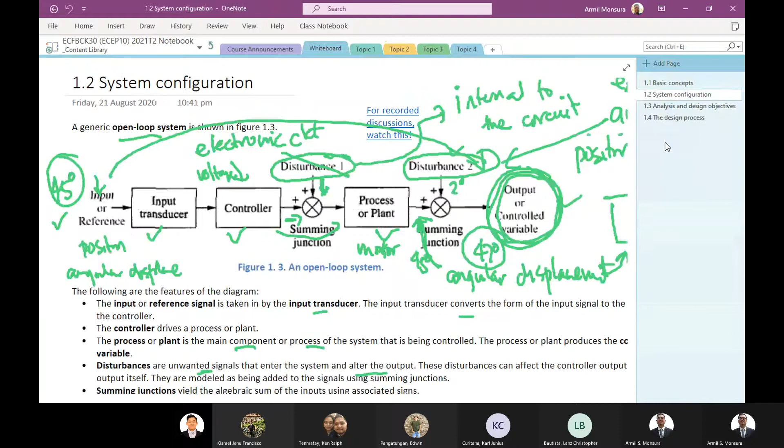Okay, so let us proceed with our next topics. This time we'll discuss yung system modeling na tinatawag natin.

We could have discussed before under this analysis and design objective. Some of the things that we need to know, especially when we want to talk about what are the major objectives of our system analysis and design. Okay, so when you say system analysis, pag-usapan natin ito.

When we say system analysis, this pertains to determining or characterization, bale, characterizing para din siya.

When you say determining or characterizing, it simply means we want to know something about the system. So ano ba i-characterize natin? Basically, we want to determine or characterize system performance. We want to know how our system is performing.

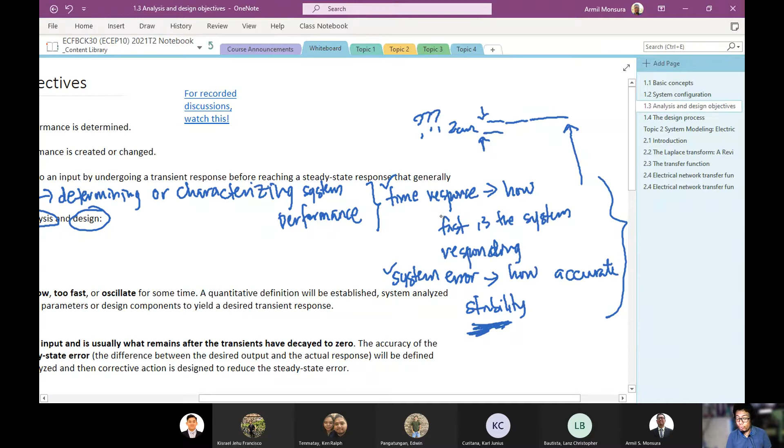So, if that is the case, then we will need to design your system in such a way that we will be producing the desired transient response and or reduce the steady state error. And we want to achieve all of this while ensuring that your system is stable still. Kasi maaaring sa una, meron kayong system, stable na siya. But you don't want its transient response or you don't want its steady state error or both. But your problem is, when you redesign your system, your system tends to be unstable kapag pinalitan mo na yung ibang parameters mo. Or pinalitan mo na yung ibang parte ng system mo, in trying to achieve the transient response or the steady state error.

So, in the system design, we would like to achieve these three simultaneously. But still, this is the most important part. This would be the most important part of your objectives. That is, while you are trying to produce the desired transient response or trying to reduce the steady state error, dapat yung system mo would be within the limits for which it would be kept stable. Is that clear?

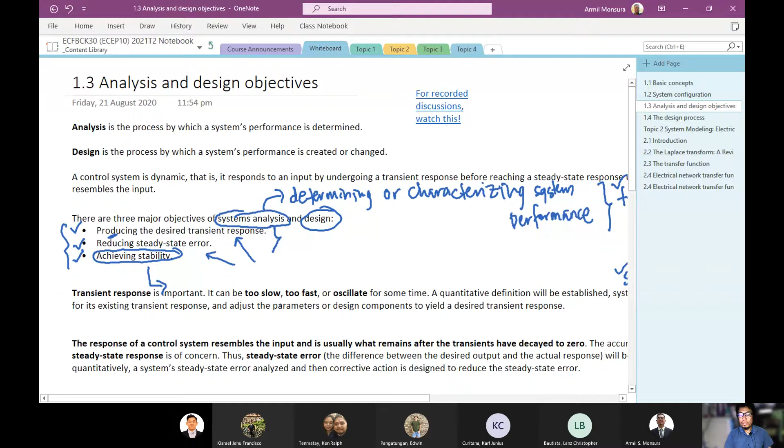Okay, so ayun. Now, in that process, we would be following this design process steps, the process by which we design your system. So, there are 6 steps here na enumerate. But I would like you to read them. And later on siguro bigyan ko kayo ng discussion video regarding dito.

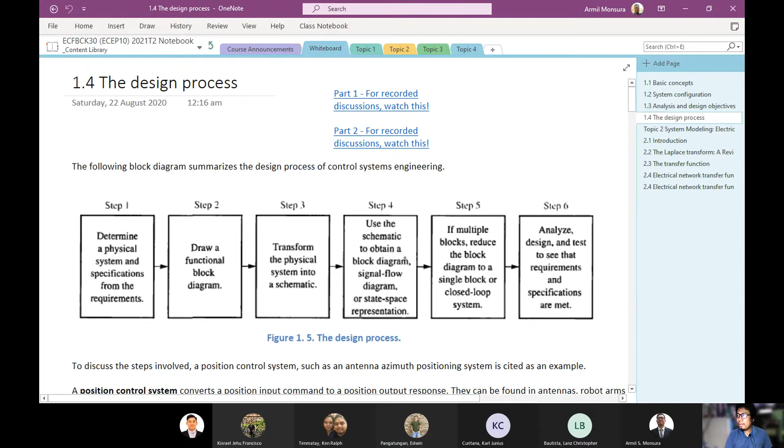Pero ayan, may mga link naman na nandito which you can actually follow. But the thing is, if you want to discuss these 6, we would be first determining the physical system and specification from the requirements. So when you say the physical system, it means the system that you would like to design. And specification, meaning what are the requirements or what would be kumbaga, ano yung mga indicator natin that we are meeting the requirements. Because there are requirements.

There are requirements for your system. Pero dapat meron kang indicator, or performance indicators. We call it performance indicators. We have performance indicators which tells you whether or not you are meeting the requirements. And these performance indicators come in the form of specifications.

For example, dapat ang rise time niyan is 5 seconds, less than 5 seconds, mga ganun. It means that you know that you are getting dun sa requirements mo. If you are able to measure your rise time to be 5 seconds or less than 5 seconds. O dapat yung peak time - these are just examples, and then later on we will be discussing these things. Your peak time should be less than, say for example, 7 seconds, so dapat it means that your system should be able to reach its peak in less than 7 seconds.

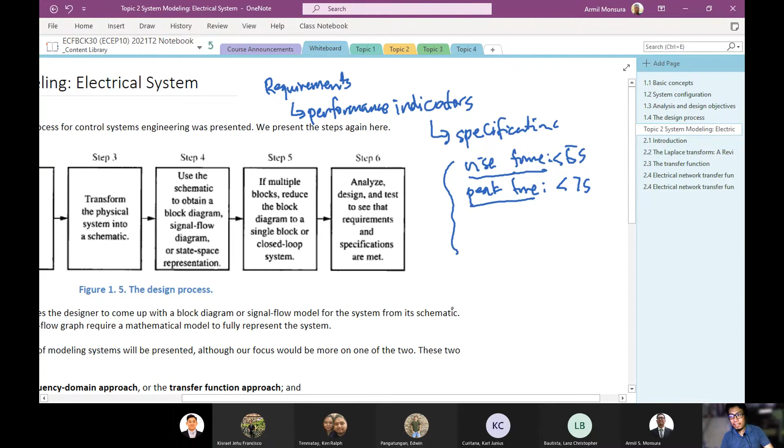So these are your specifications din tawag. And the performance indicators are this. So you specify your requirements in terms of these things. So from there, at the start, dapat alam natin yun - what would be your physical system and what would be your specifications, or what are the specifications of your system from your requirements.

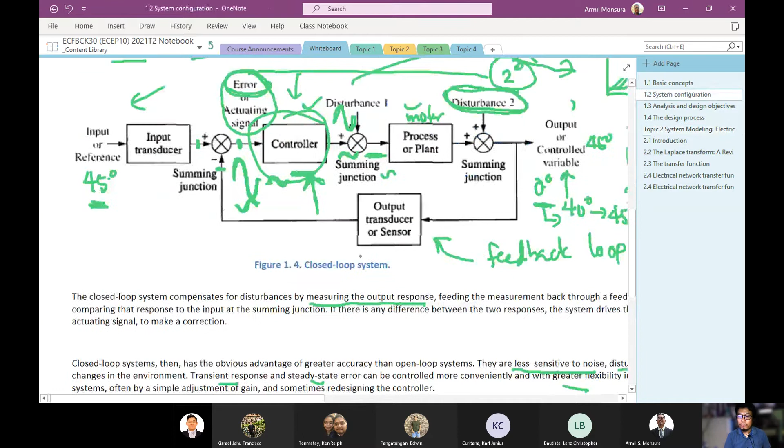Okay, the next step of which is you draw a functional block diagram. When you draw a functional block diagram, it comes in the form of this. Kung maalala nyo yung pinag-usapan natin ito last time, it should come in the form of this one. So which means that you have to determine what should be its input transducer, what should be its controller, what should be its plant or process, and what should be the output transducer. And some other things that are required for the system. So that would be the functional block diagram. Is that clear?

Yes, sir. Okay, now,

So that's your functional block diagram. We will have to pattern your block diagram in terms of that closed loop configuration. Now, the next thing is to transform this physical system into a schematic.

After you determine the relationships between those components, you will be able to determine what components you have. What kind of input transducer do you have? What kind of controller do you have? What kind of plant do you have? What are the components here? You will be able to determine all of those, and then determine their relationship in terms of this functional block diagram.

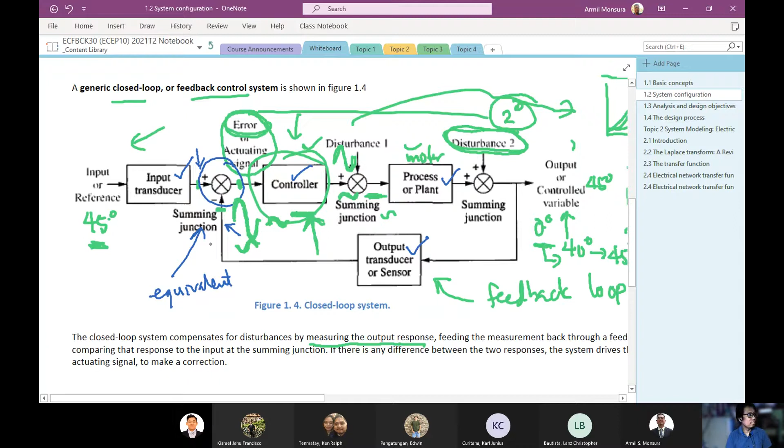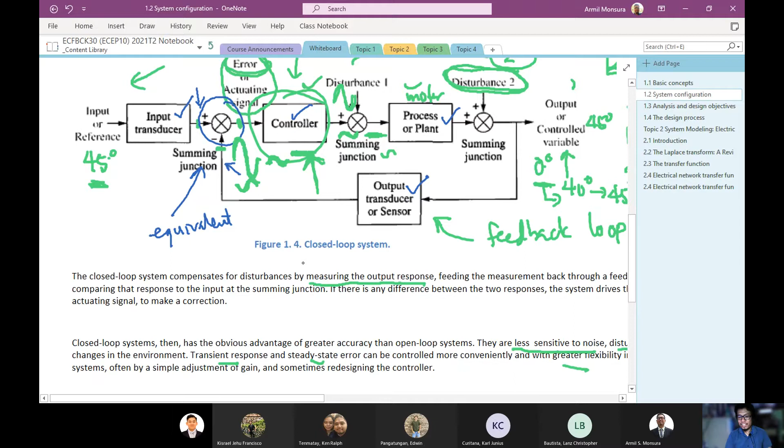May iniisip ba tayo? This should be pretty basic for us since we've covered a lot of electronics by this point, so we should already know this. Wala tayong naiisip na circuit na pwede mag-subtract ng dalawang signal?

Naalala niyo yung... Wait, sir, sa op-amp yun, sir. Ha? Yung alin? Sa op-amp yun, di ba, sir? Anong op-amp? Anong configuration ng op-amp?

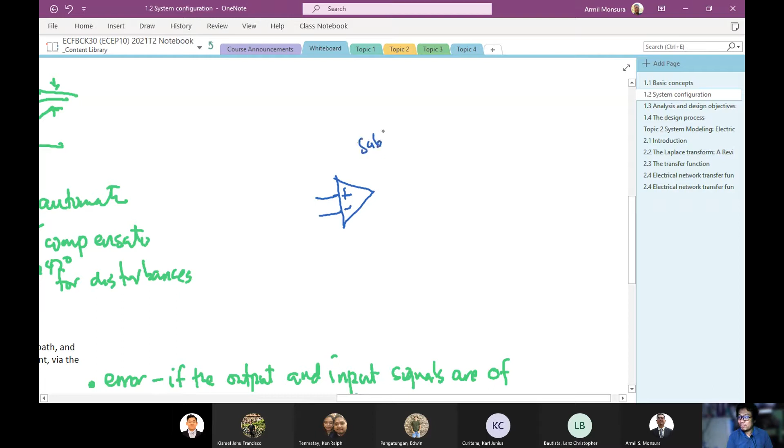Actually, tama yan. Wait, sir, naalala ko. Meron tayong tinatawag na yun, na subtracting, or ano ba tawag dito? Meron tayong configuration ng op-amp that can actually subtract, your circuit. Meron tayong tinatawag na subtracting amplifier or adding amplifier.

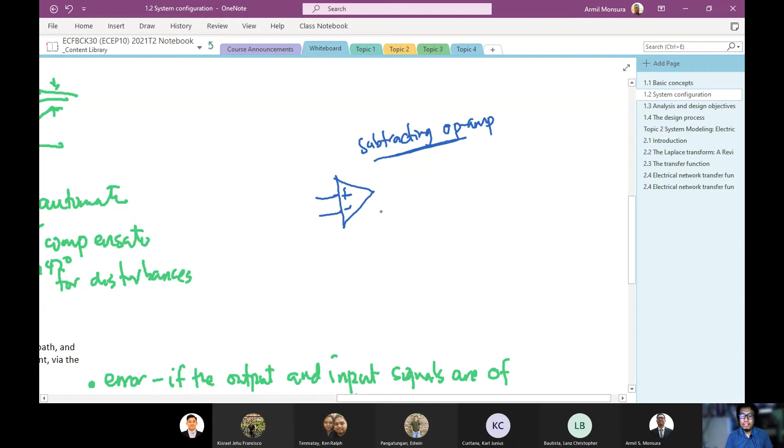Okay, so we can actually use that. We have a configuration of op-amp that can actually perform subtraction. We call that a subtracting amplifier. So we can use this as a circuit that can actually perform subtraction.

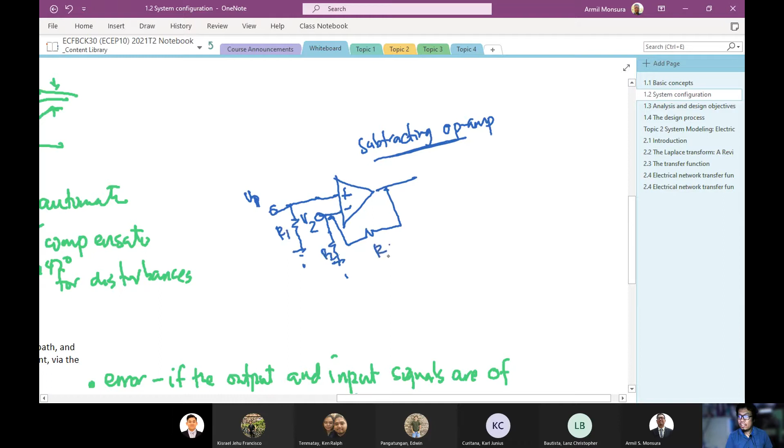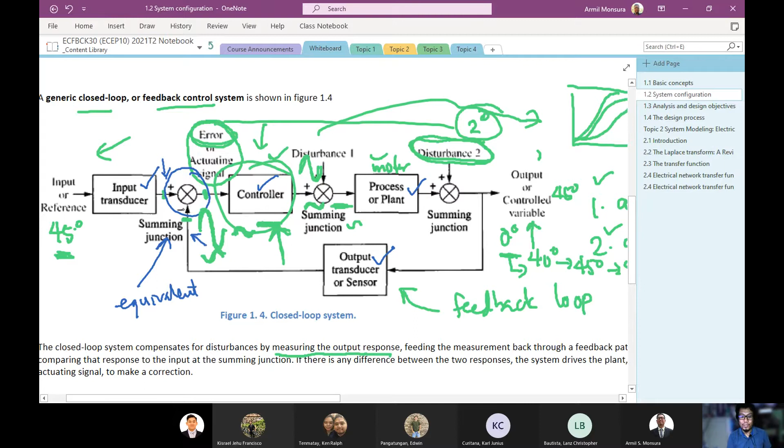So these things are not really, for example, this summing junction can be represented by a subtracting operational amplifier. But it doesn't mean that this controller is actually a separate entity from this summing junction or from your subtracting op-amp, kasi you can actually have this same thing — this may be your subtracting op-amp plus your controller.

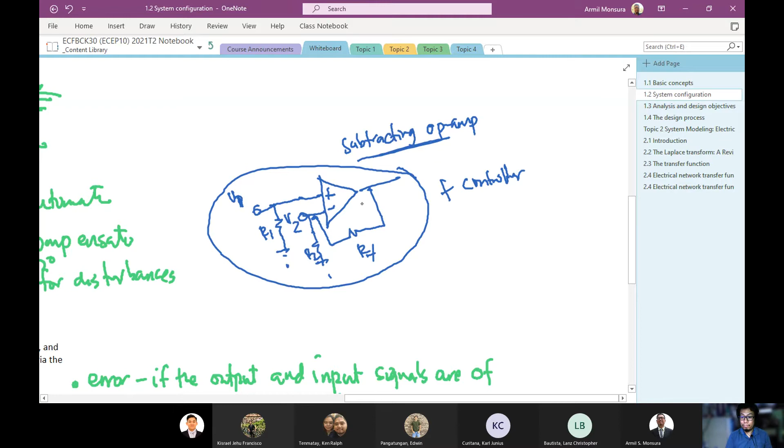You can actually put in some additional components here that can transform that circuit into this part of your functional block diagram — it can actually be represented by a certain circuit. So maybe you use just one op-amp for that too, but they can also be separate.

It doesn't mean that if you see a summing junction here, this can also be represented by an op-amp. For one thing, this disturbance here is simply basically a concept — konsepto lang siya. In this case, for example, this represents an internal disturbance or internal noise that is exhibited in your controller circuit.

So this summing junction is in no case a physical entity or a physical circuit itself, kasi ito is simply just a concept that you integrate your internal noise into in your analysis. So what I'm trying to point out here is that your configuration may or may not be physically represented in your circuit.

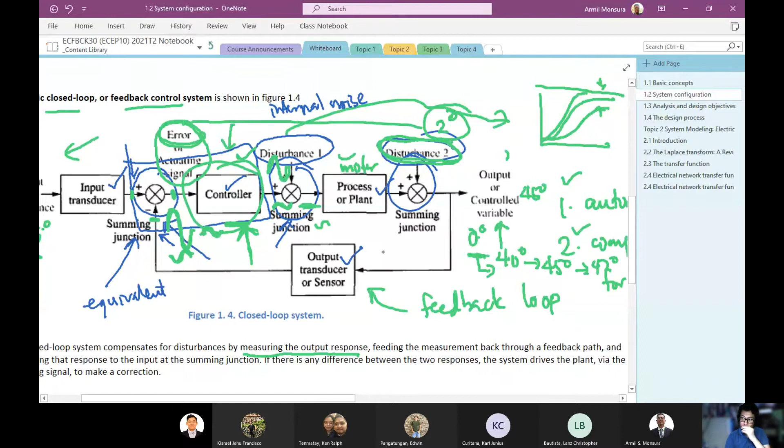Disturbance 2 is another concept - that of the external disturbance that affects your process or your plant. And it's actually affecting the output.

So when you put this functional block diagram into a schematic, what is required of you is to actually know the system in its full operation, so we know which component we will really see inside the schematic, and which ones are just concepts that will not really appear on your schematic.

That is why, when you transform this functional block diagram into a schematic, you should be really careful. One thing you have to master, one thing you have to be mindful of when doing step 2 and step 3, is that you really have this mastery of what we call modeling. You may know the functional block diagram but not really know how to transform it into a schematic.

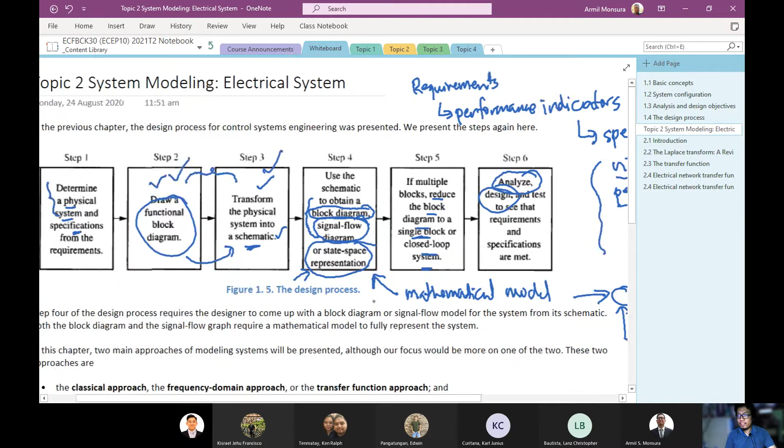But then again, what you need to think of is that these steps are not actually linear. Sometimes, for example, in our approach, we will try to skip step 5 first. If we're good at step 4, we skip step 6, then we go back to step 5 in a linear fashion, then back to step 4, then step 6, then step 5, then step 6 again, something like that. So in our lesson, this is not really linear, and in actual practice, this is not actually a linear process. When you say linear process, it means straightforward, this is how you do it. You would not be doing that in that manner.

And especially, there are times that you would not be performing these steps in this exact process. For example, from here, after obtaining a functional block diagram, you would be able to skip this part, and instead of doing all of this, you would try to come up with a computer model. That means the computer generates the model for you - the computer itself or the software itself would actually obtain the model for you.

But there's something you need to input into the system. Like, for example, you need a set of input and output signals for your computer, for your software, to come up with a model by itself. That means you need to already have the system built. You have a test input signal, you take its output - the input-output pair of your signal from your system - and you put that into your computer. Then the computer, using that set of signals, generates the model for your system.

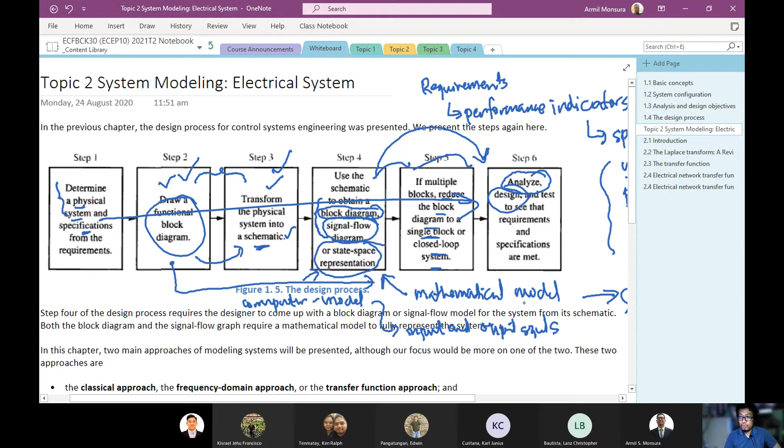So in this case, we're saying that one thing you have to perform after completing step 1, step 2, and step 3 is this: you obtain a block diagram, a signal flow, or a state space representation, in which we would like to get a mathematical model for your system. This particular part of our lesson would actually deal with system modeling.

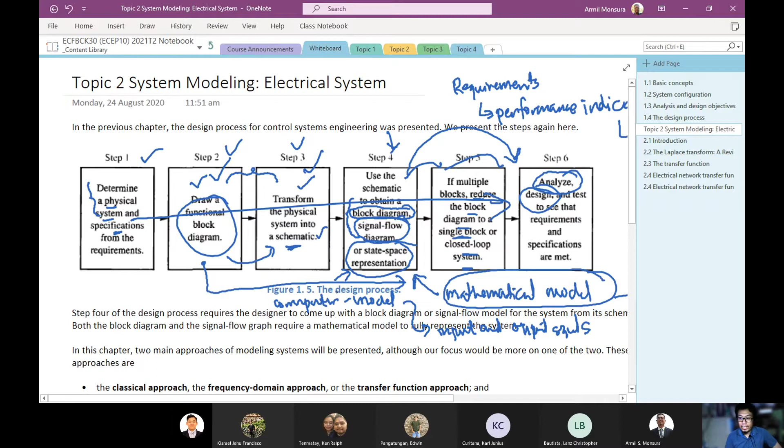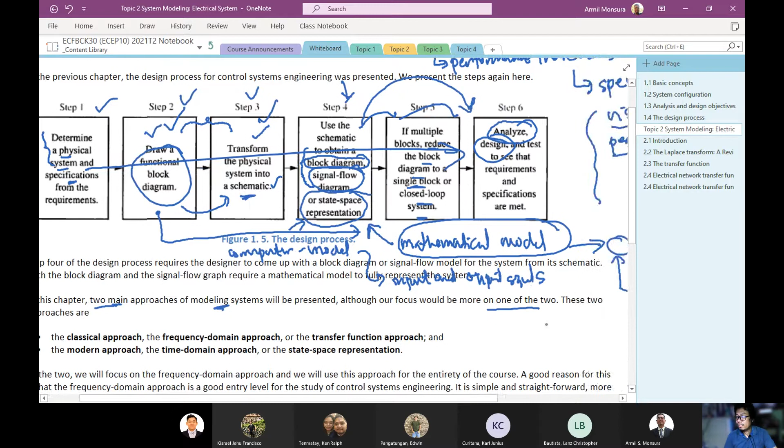I will introduce you to two main approaches in modeling systems, but we will focus on one of those two. The two approaches are the classical approach, or the frequency domain approach, also called the transfer function approach, and the next approach which is the modern, time domain approach, or the state space approach.

The classical approach basically deals with the Laplace transform model. Now, I'm pretty sure all of you have already finished advanced engineering mathematics, so you were able to study what the Laplace transform is. Am I right? Yes sir. Okay, so since you already know the Laplace transform, we'll actually study Laplace transform in the next topic. We'll discuss it, but it's expected that we already know this Laplace transform.

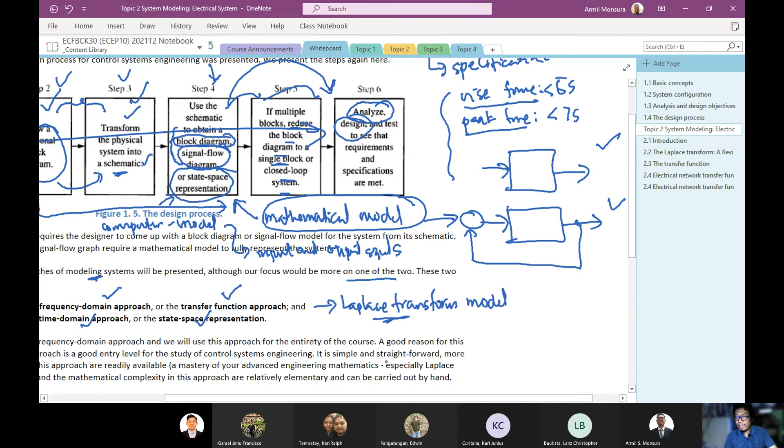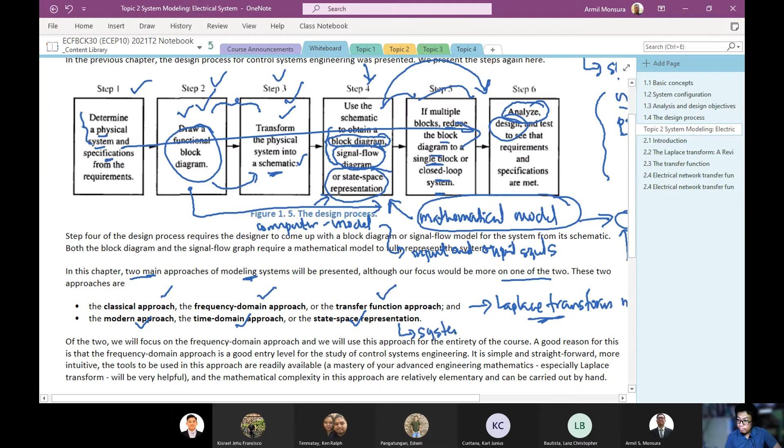Now, the next approach I would introduce you to is the time domain approach. We have a modeling approach called the state space representation. Now, the state space representation consists of a system of first order differential equations.

So, for example, if you have a second order system, you have to break down that second order system into two first order systems or first order differential equations. When you say a system is second order, it means your system is represented by a second order differential equation - its input-output relationship is represented by a second order differential equation. That's what we mean by a second order system.

In state space modeling or state space representation, you would have this second order differential equation broken down. We need to break it down into two first order differential equations.

That is why it's called a system, because it means that you have multiple differential equations. You don't just have one, but multiple differential equations, and all of those differential equations are of first order.

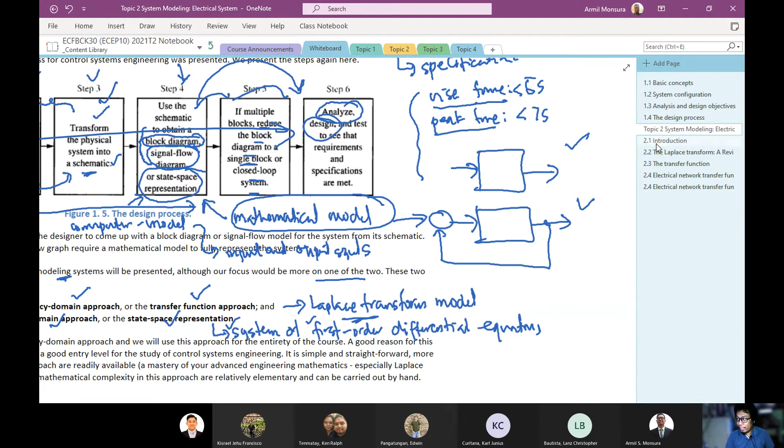So now, I'm discussing Article 2.1. Let me shift the discussion here.

As I have said in the previous discussion, there are two approaches. One of them would use frequency domain.

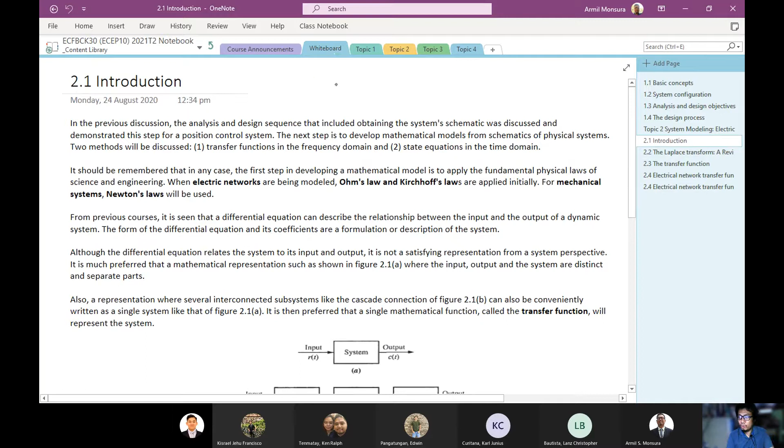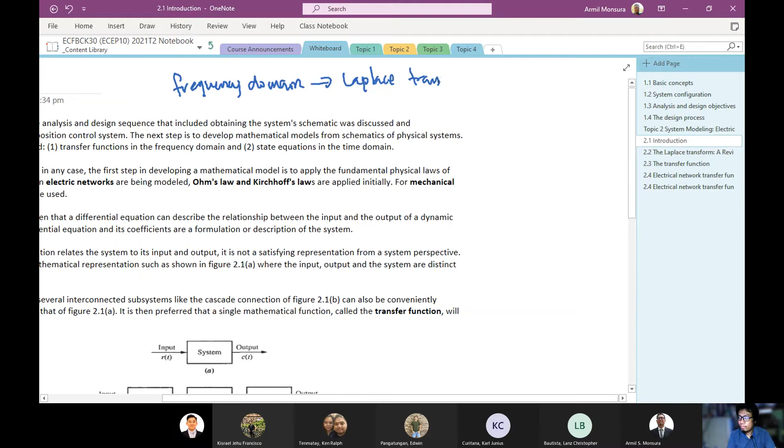And the other one would use, or it would use, Laplace transform. The other one is the time domain, which would use differential equations.

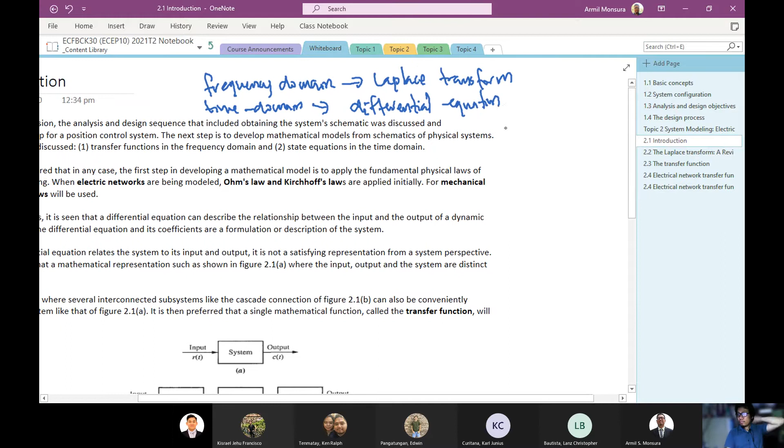So, in terms of the Laplace transform.

In the previous discussion, the analysis and design sequence that included obtaining the system schematic was discussed and demonstrated in this step for a position control system. The step is to develop mathematical models from schematics of physical systems.

So we have discussed two methods. I am discussing two methods now. Number one is the transfer function, and the other one is state equations.

It should be remembered that in any approach that you would use, the first step is to apply the fundamental physical laws of science and engineering.

So if you would be starting the modeling in its very basic and fundamental sense, you would start with the basic laws of science and engineering.

For example, if you are talking about electrical networks, you would be using Ohm's law and Kirchhoff's law in order to come up with models. For mechanical systems, you would be using Newton's law or Newton's laws of motion.

But again, this applies if you are to come up with a model that comes from a schematic.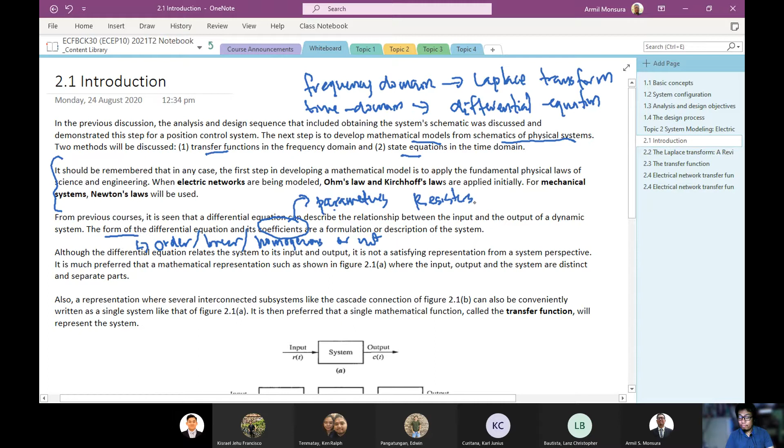For example, if your system is electrical, it has a resistor, it has resistors, it has capacitors, and in some cases, it has inductors. Their values are actually called parameters.

For example, if your resistor is 10 ohms, your capacitor is 1 farad, and your inductor is 0.1 Henry, these are what you call parameters.

Those are what you call parameters. And depending on the system, there are many other things you could put in as a parameter in the system.

So basically, in its basic sense, a parameter can be described as something that is constant to the system. But not really constant, because if that part, that system or component, is replaced, its value is no longer the same.

So basically, it is constant for a particular situation.

That is how we define a parameter. For example, sa motor mo, meron itong mga certain set of parameters. May mga values yan that is put into your equation as a parameter or as parameters. Ngayon, pag nagpalit ka ng motor, yung lumang motor ay pinalitan mo ng bagong motor, itong mga parameters na to would actually be changing. Maaaring hindi magbago yung forma ng equation mo, pero ang magbabago yung mga coefficients niya. Is that understood kung ano yung role ng parameters sa model mo?

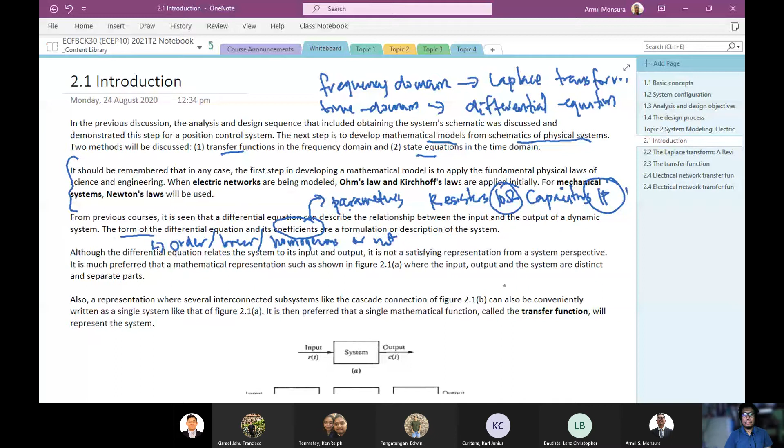Okay, mukhang dalawa lang nag-reply. So, kumbaga, pag nakakita kayo ng mga coefficients sa model natin, whether it's in the form of the differential equation or of the transfer function, yung mga coefficients na makikita nyo doon are actually coming from the parameters. They would actually originate from the parameter, from the components. Those coefficients are called parameters, and these parameters or coefficients would actually originate from the components of your system. So later on, mapapansin nyo naman yan.

Now here's the thing. Pag meron tayong system, the input to the system or the signal that is an input to the system is designated as R of t. R is for R of t, it means R as a function of t. And that R stands for reference input. Kaya yung signal na yun, we refer to that as the reference signal. We use the notation R of t to represent the input signal to your system.

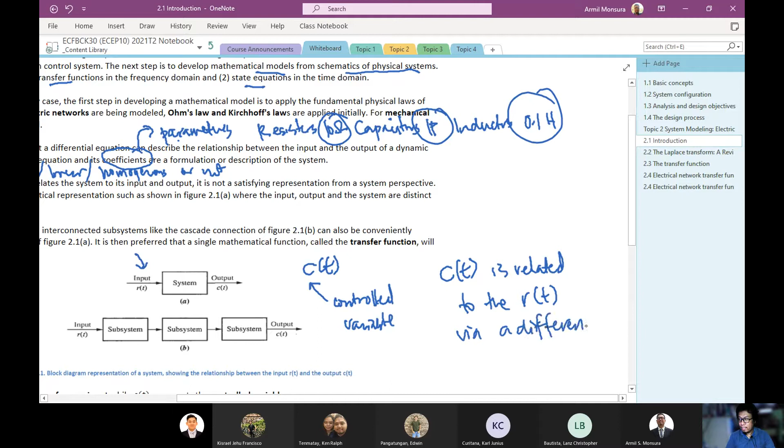Now, when we describe your system in this manner, your C of t is related to the input signal or the reference input via a differential equation. Yung relationship ng C of t at saka ng R of t is basically controlled or described using a differential equation such as this one. Ganyan yung itsura ng relationship between C of t at saka ng R of t, if we describe your system in this manner.

So as you can see, medyo may pagka-komplikado siya, di ba? It actually is very complicated with that one. What we like to do with this one, ang gusto sana natin is there is a simple way to actually relate these two. And that simplest way is actually done using Laplace transform.

So the easiest way to actually relate the two is by actually obtaining the Laplace transforms of R of t and C of t. And in that case, we would be able to describe, makikita nyo ito in a later topic, that equivalent system in terms of the Laplace transform R of S and C of S, as your input, or the transformed input and the transformed output itself. And using this, we would be able to characterize this system using the notation G of S, and that we will find that C of S equals R of S times G of S.

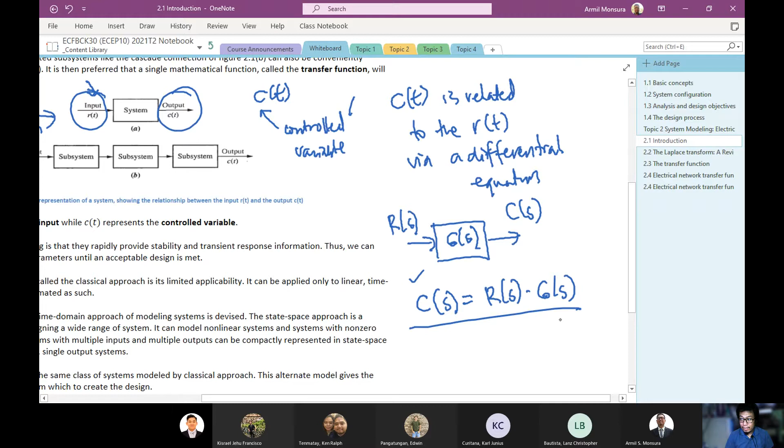So, mare-reduce natin yung problem natin in a simple product notation. Kumpara nyo yan dito: for you to be able to relate C and R in a single equation, you need to describe them using a differential equation. Pero, using the Laplace transform, we can reduce that problem in this manner, magiging simple product na lang siya. And G of S here is what we will call later as the transfer function, which characterizes your system.

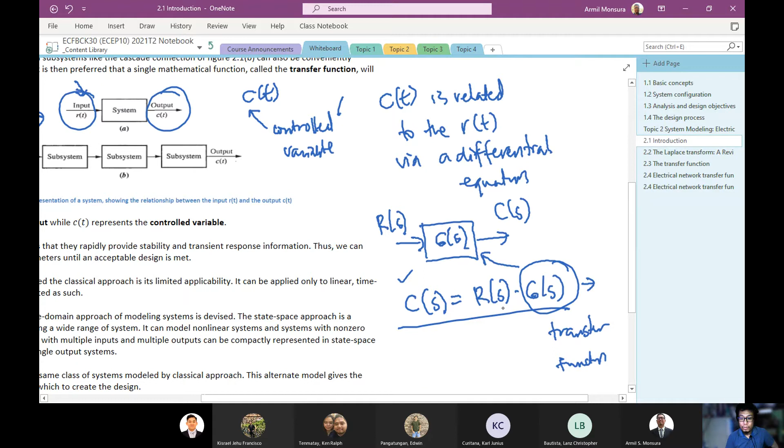Yan yung transfer function approach. Pero there is a problem with that part. Pag-usapan natin yung advantage muna. A major advantage of frequency domain modeling, yung transfer function approach, is that they rapidly provide stability and transient response information. Kumbaga, the frequency domain modeling is very intuitive, which means that using the transfer function itself, you would be able to find stability and transient response information without really computing so much things.

The good thing about the transfer function approach is that you can obtain various information about the system without actually doing very complicated mathematical computations. That's its main advantage - it provides intuition to the system designer.

The primary disadvantage is its limited applicability, meaning there are certain restrictions that limit which systems this approach can be applied to. It can be applied only to linear time invariant systems, or any systems that can be approximated as such. If your system is non-linear, or exhibits non-linearity, then your approach would actually break down - it can't properly represent your system.

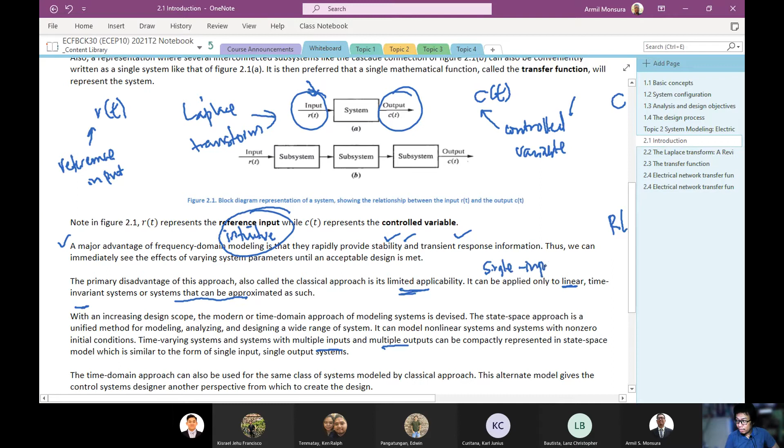Time-varying systems, and systems with multiple inputs and multiple outputs, can be compactly represented in a state space model. So the problem with the transfer function approach is that it can only model single input, single output systems - just one input and one output that we can model at a time.

If your system consists of multiple inputs and multiple outputs, we can still represent it using the transfer function approach, provided that the entire system is actually linear. But the more difficult part is that you need to produce a transfer function for as many pairs of input-output that can be deduced from the system.

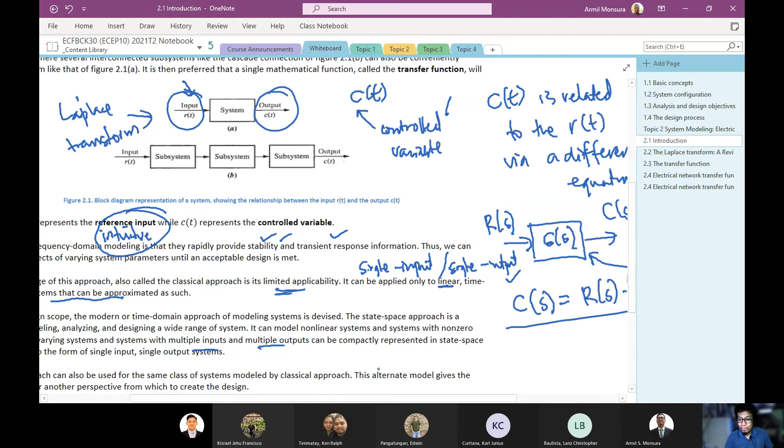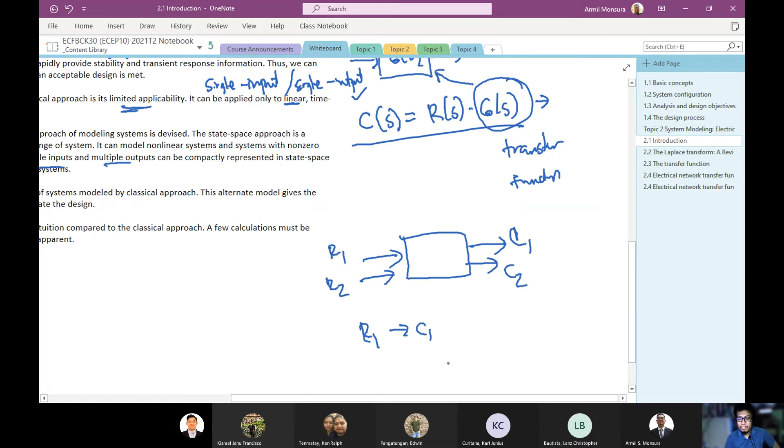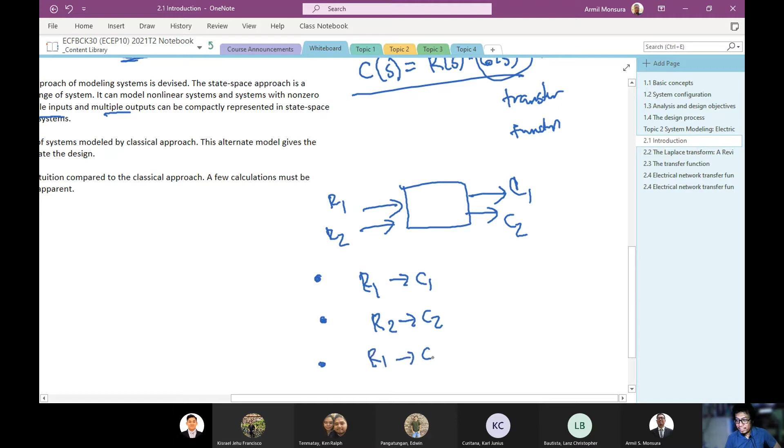For example, say your system has two inputs and two outputs - R1, R2, C1, C2. How many pairs of input-output can we form from this? One pair is input R1, output C1 - that's one. What other pairs can we enumerate? R2 and C2. What else? R1 and C2, and R2 and C1. So how many total? Four.

There are four input-output pairs that can be deduced from this two-input, two-output system. This also means it requires four transfer functions for you to be able to fully describe this system. So in terms of the transfer function approach, you need four transfer functions to describe the entire system.

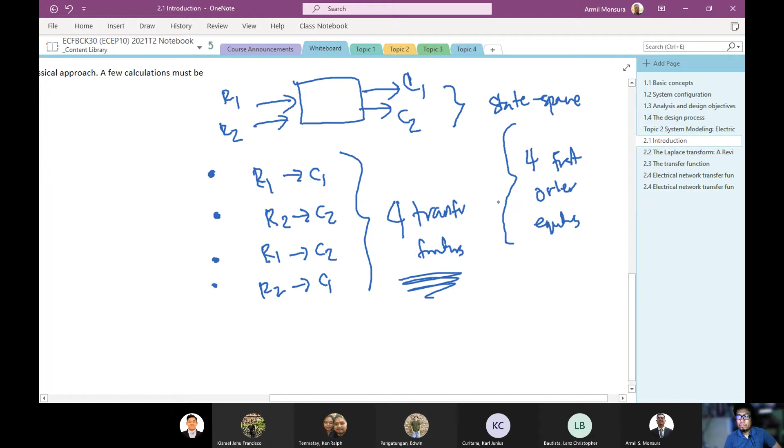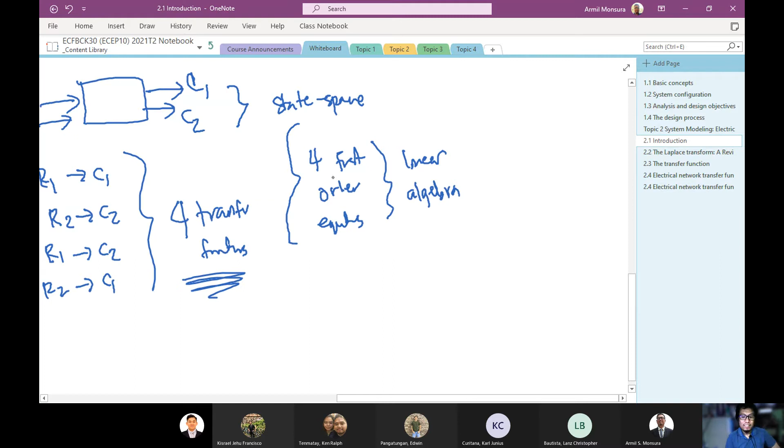However, for you to be able to solve this, you need knowledge of linear algebra - a profound knowledge of linear algebra to solve this kind of problem. In our case, we don't need something that complicated, so that is why we would stick with transfer functions, since most of the systems we analyze are single input, single output systems.

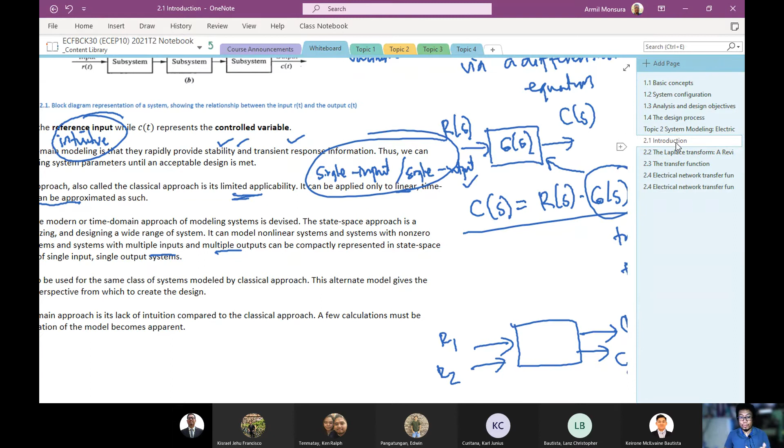Basically, what we need to study is the transfer function approach, in which we will be dealing with Laplace transform in order to get that. So we will first have a little review of what the Laplace transform is.

The Laplace transform satisfies the requirements for the convenient mathematical representation of your systems using transfer function, as we discussed in the previous topic. Furthermore, the Laplace transform makes the relationship between systems algebraic.

So instead of the usual description of your system, we will be able to reduce that description into something like C equals R times G - basically that's the input times the transfer function, and that will be your output, or the transform of your output. That's how we will be able to describe your system after using the Laplace transform.

So the Laplace transform is defined this way: that's the integral of f of t times e raised to negative s of t, d of t, from 0 to positive infinity.

So we are talking here of what we call the one-sided Laplace transform. It means we will just be performing this integral on the positive half of the number line. So what are the implications of that?

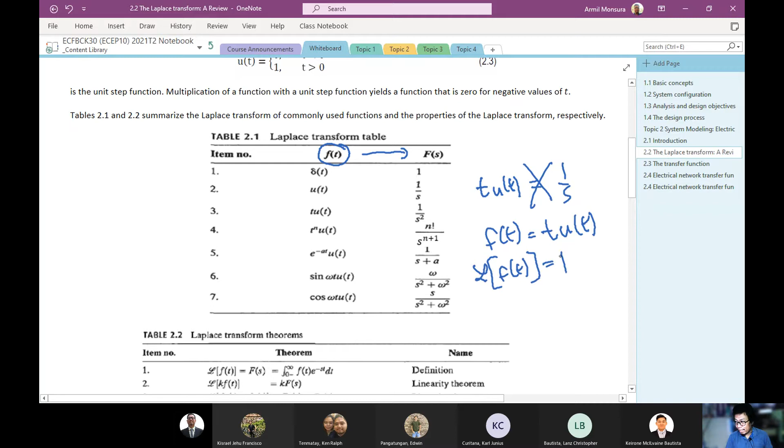Isa pa ha, it doesn't mean, for example, that delta t, or for example you have here t, u of t here, is actually equal to 1 over s. Hindi yan, hindi yan totoo. You have f of t, or if f of t is given as t u of t, its Laplace transform, or the Laplace transform of f of t, which is f of s, is equal to 1 over s. Pero it doesn't mean that t is equal to 1 over s. Okay, this is very wrong. Yung tatandaan niyo, this is very wrong.

So parang ito yung mas tamang statement diyan. If f of t is given as this one, then f of s is this one. And it doesn't mean that these two are equal. Transform kasi yan. When you say transform, you are changing, or you are changing the domain of the function. You are remapping. Transformation, transforms means remapping.

When you are remapping, it means that kung ito yung function ninyo in terms of the t domain or of the time domain, so ibig sabihin yung x-axis niyo dito is in time domain. When you remap this function in another domain, it means that yung x-axis niyo dito magiging s na. And isang point dito can actually be put in another point here. Say for example dito, another point here can actually be put in another point here. So may iba yung itsura ng function niyo.

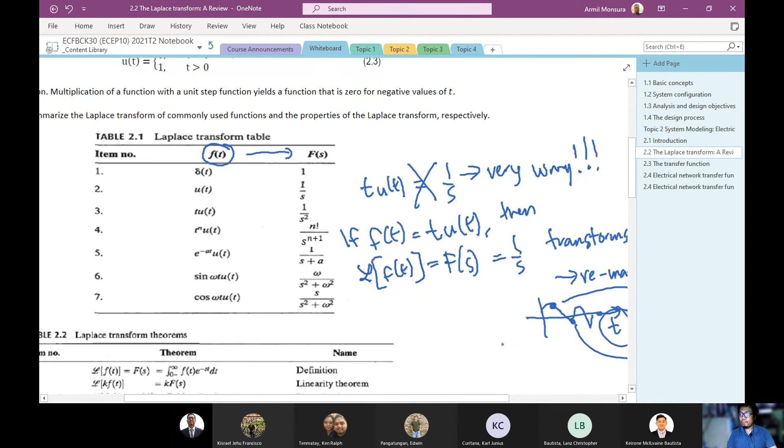Saglit lang. Okay, so ayun, yun yung tatandaan niyo diyan.

Now, we will not, kasi tapos naman na kayo dito sa advanced math, I suppose. So what I would like to emphasize here is that instead of actually going through this integral, which is what you have done in your advanced math course, hindi tayo dadaan sa integral part. What we will simply do is we will use this table, kasi meron na tayo nung mga simple functions or mga basic functions, ano yung Laplace transform pair nila.

Okay, but what we will do is instead obtain yung Laplace transform ng mga functions that are not in this table. If they are not on this table, kukunin natin yung Laplace transform niya using this table and these properties. So gagamitin natin itong table na to at saka itong mga properties na to. Okay, so as I give an example later on, i-point out ko dito which of the properties that I would be using.

Okay, and one more thing that you have to remember about this table. Yung U of t is basically this one. Okay, U of t is what we call the unit step function. This is the unit step function.

Now, what we will try to do is, since again, as we said, yung Laplace transform niyo is defined on positive values of t. At ang unit step function niyo is basically 0 naman for negative values of t. Then we can use this other half of the definition for your U of t, which is 1 for positive values of t. Which means, ito, pwede natin i-equal na to basically sa 1. Okay, so ibig sabihin, yung Laplace transform ng 1, ng f of t equals 1, is basically 1 over s.

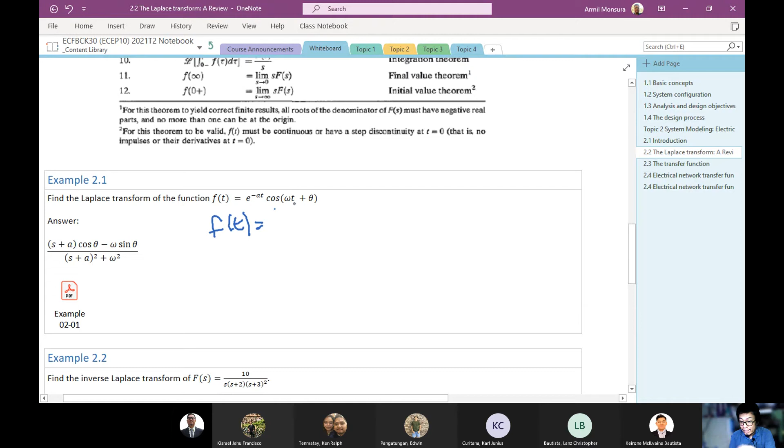Okay, now this is what will happen. We will reduce this, or we will transform this function into something, into an expression na makikita natin yung transform nila dun sa table, and at the same time magagamit natin yung properties dito.

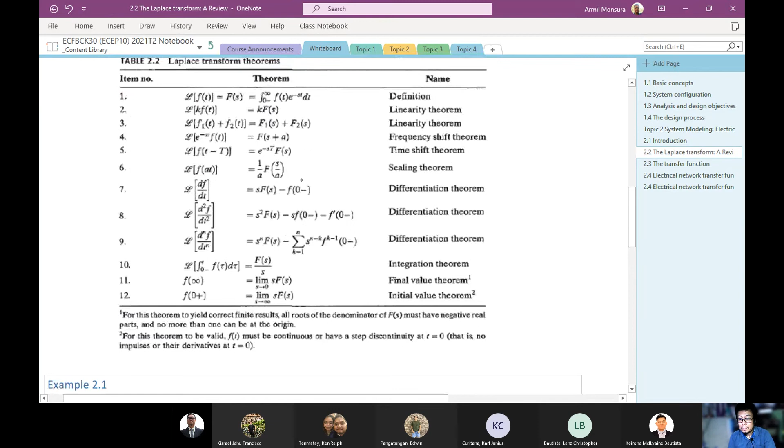Okay, so first thing, para magawa ko yun, unang-una, let us expand this. Kasi unang-una, wala kayong makikita ang cosine at saka sine dyan na merong addition of angles. Okay, so since walang sum of angle na function dito, we would transform this part using yung sum of angles formula o sum of angles property ng cosine function natin.

Okay, so you can verify that dun sa mga table of identities ninyo. We can reduce this, or we can transform this, as cosine of omega t, cosine of theta minus sine of omega t, sine of theta. Familiar ba kayo dyan? Dito sa to? Yes, sir.

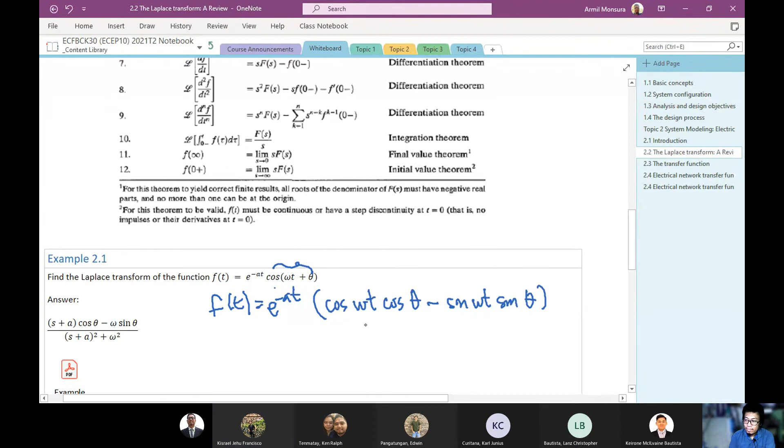Okay, so sige, then expand natin siya. So you have e raised to negative at cosine omega t cosine theta minus e raised to negative at sine omega t sine theta.

Okay, again, as I said at the start, variables such as a, omega, and theta are constants. Okay, that should imply that itong cosine of theta na to at saka yung sine of theta na to are constants. Because if theta is constant, cosine of theta is also constant. Same thing with this one. If theta is constant, sine of theta is also constant. Maliwanag ba?

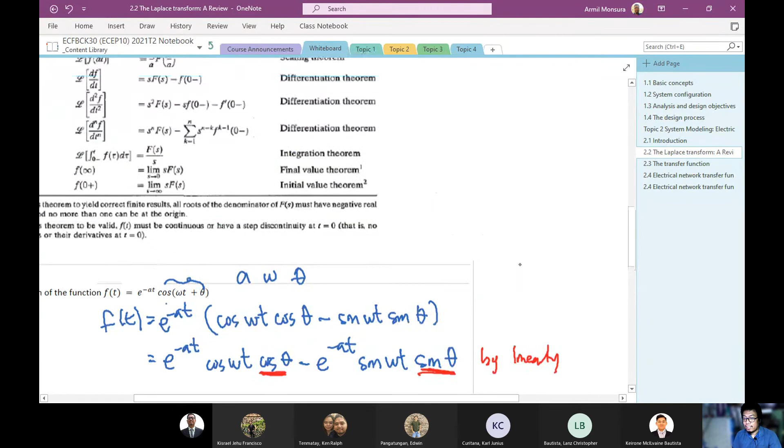Yes, sir. Okay, now in that case, by linearity, okay, tingnan nyo ito mabuti. Number 2, okay. Makikita nyo dito that the Laplace transform of a constant times a function is equal to the constant times the Laplace transform of the function. It means I can take out the constant and then obtain the Laplace transform of what is remaining.

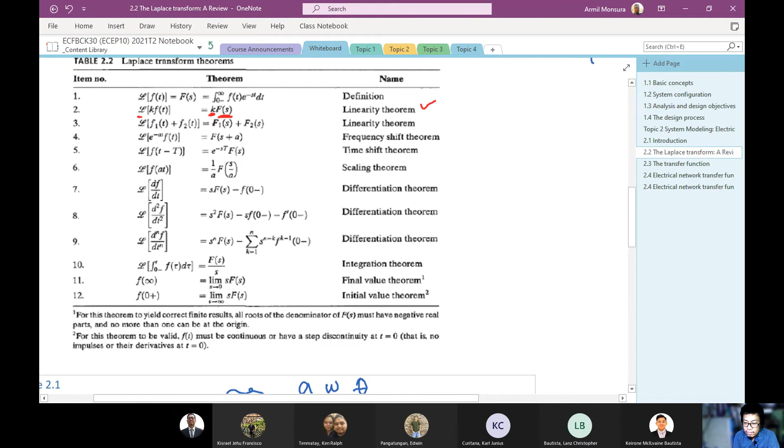Okay, it means now that if this is constant and this is your function, para makuha ko yung Laplace transform nito, for me to be able to get the Laplace transform of this one, the Laplace transform of f of t, which is now f of s, for this one, I would obtain yung... kasi lalabas ito, function to kasi ito constant. So I can simply take out the constant, and then obtain the Laplace transform of e raised to negative at cosine omega t.

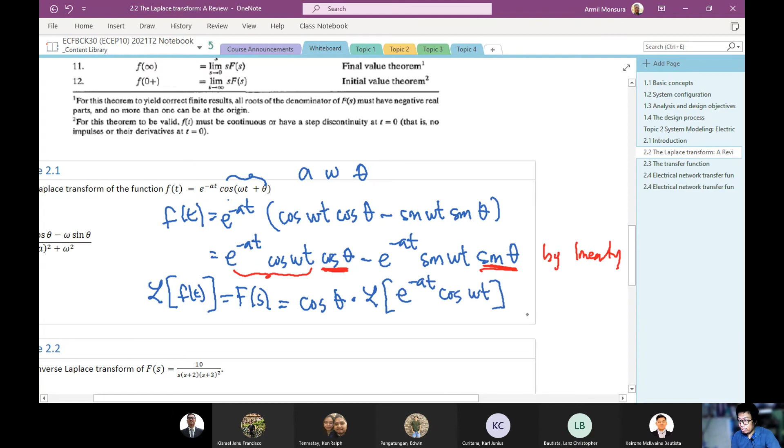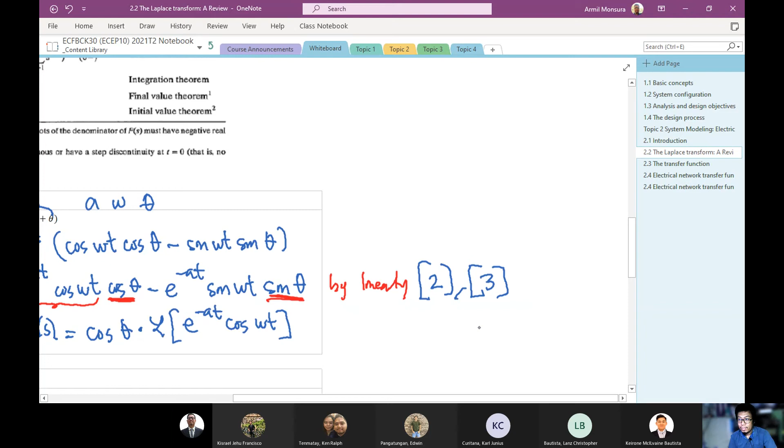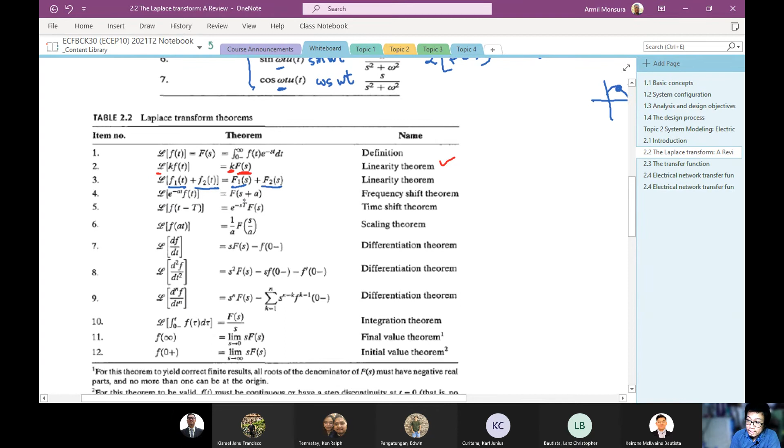Yan yung linearity na number 2. Okay, but also at the same time, I would be applying yung linearity number 3. Ano ba yung linearity number 3? It means that if you have two functions, you have to obtain the Laplace of the sum of two functions, then you can simply just obtain the Laplace transform of each terms and then add them up. So in that case, ma-apply ko yan dito kasi isang term ito, isang term din ito. So pwede kong i-apply yung linearity in that case.

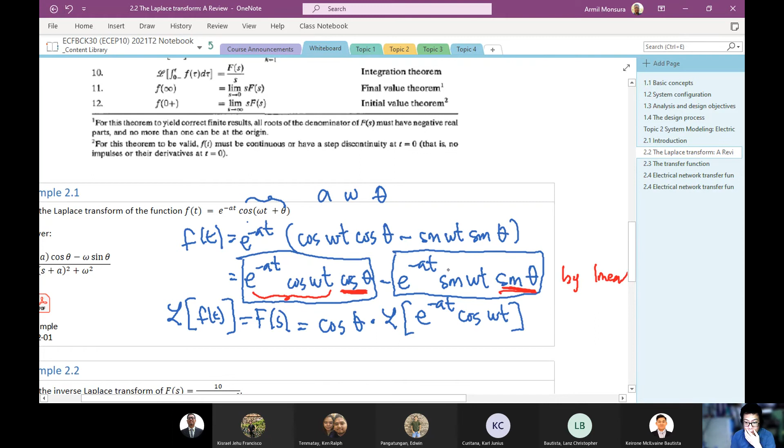Kukunin ko yung Laplace transform nito, kukunin ko yung Laplace transform nito. Okay? Is that clear? Yes, sir. Yes po, sir. Yes po. Okay, so this would be written as minus... again, in this case, para ma-apply ko yung linearity number 2, I would have to take out sine of theta, and then kukunin ko yung Laplace transform ng e raised to negative at sine of omega t. Okay? Is that clear?

Okay, now how do we get the Laplace transform of this one? For example, this one.

In this case, again, this is not yet in your table. Because in your table, you only have cosine of omega t. But you don't have e raised to negative at times cosine omega t. You don't have that kind of thing in your table. But here's what we do.

We look at property number 4. If you look at property number 4, it means that you have a function multiplied to an exponential. It's e raised to negative at times f of t.